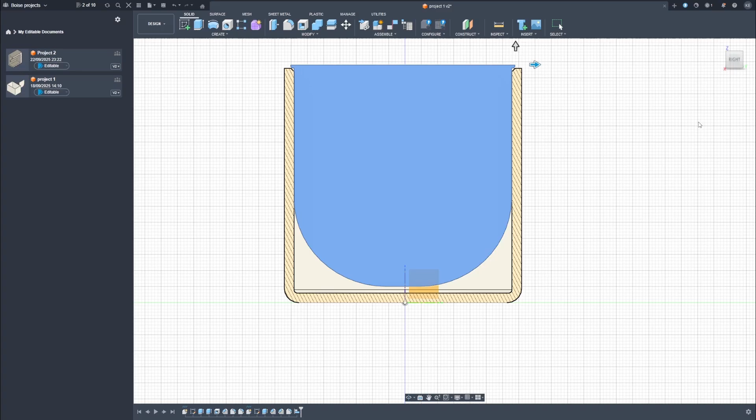So all I'm doing at this point is just adjusting the scale of the divider. It's not the best way to do this because it leads to parts of it not actually being to the same ratios as before, but it's a simple and easy fix and it should hopefully work. So let's quickly print this out.

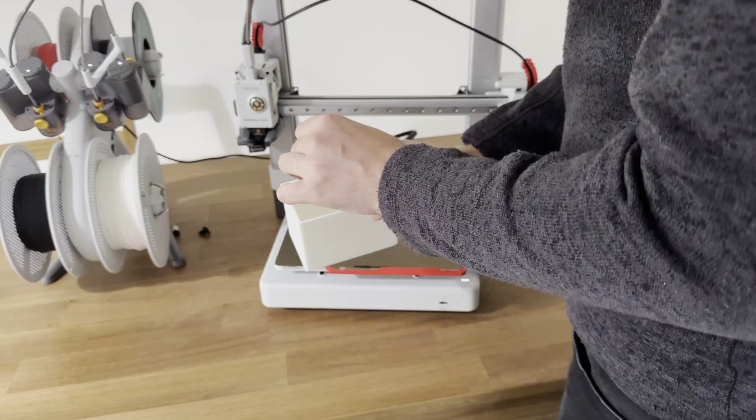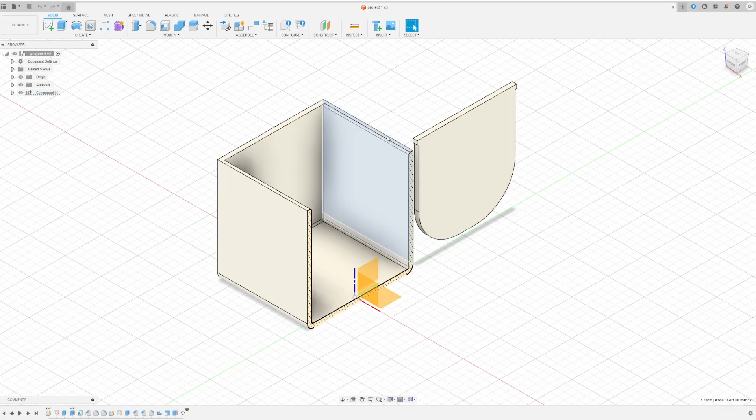Okay, so now that we're back in Fusion 360, this time I'm going to try and show a bit more of my workflow in creating this. First of all, I think we just need to remove this cutaway, which is... inspect. Yeah, so I'm definitely still new to everything.

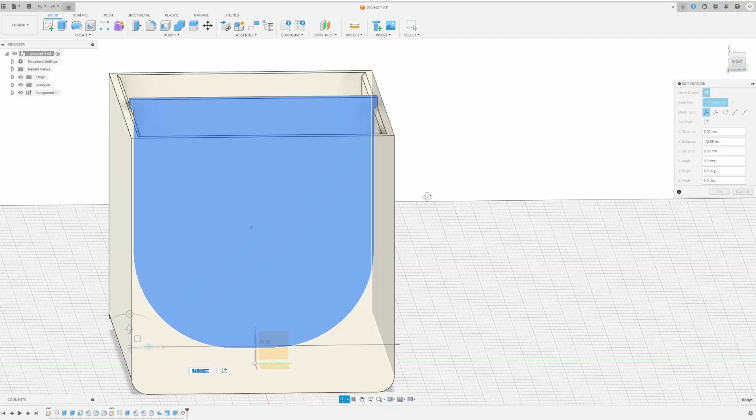Okay, now that we've got rid of that section view, let's just move this back. Should be pretty easy to about there. Probably should have done this before I removed the section view, but that seems good enough. Just want that basically recentered.

Okay, so now that that's all moved back in there, the way we are going to basically make a lid for this is we are going to construct an offset plane. I'm going to select that plane, but of course that body's in the way, so let's just quickly hide that.

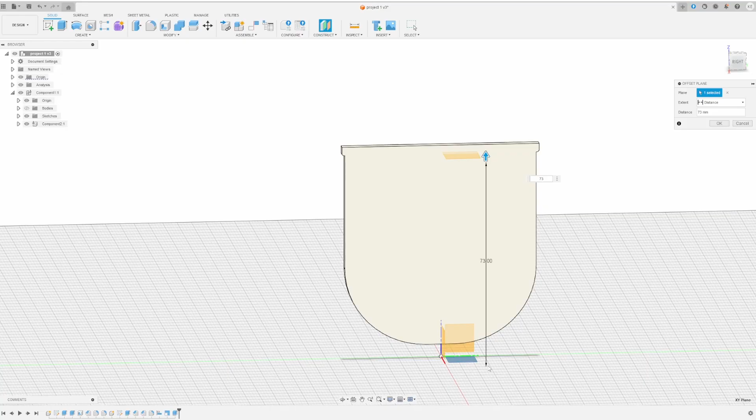Select that. I'm going to want it 73 millimeters high. Yep. So that is now perfectly in line with this.

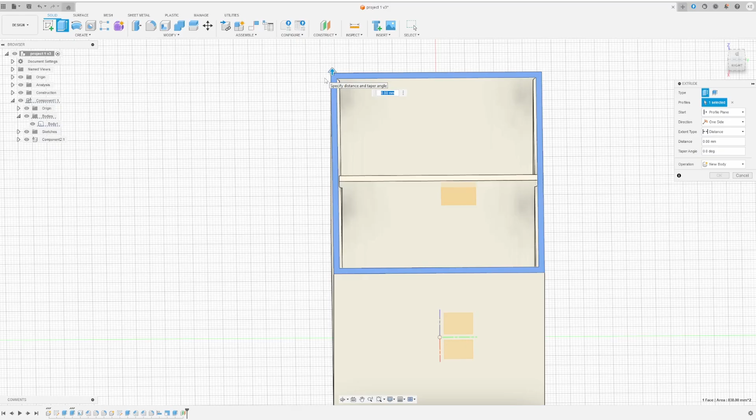We're then going to select this entire body. I'm going to work on this. Select this face, extrude it. We want 15 more millimeters for the card, plus a little extra, so let's bring that up to 17. There we go.

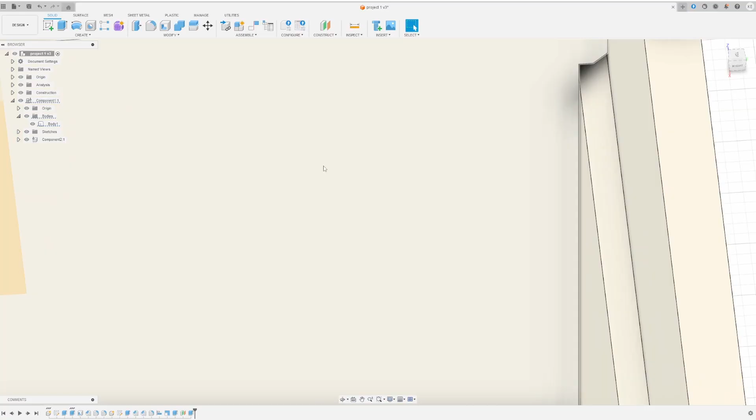So of course we still have the problem then that this is probably going to intersect this, because while it may look like a load of space here, it doesn't here. So we may need to insert these, but now what we can do is go into our...

Split body. Body to split is this one. Splitting tool is this plane. Okay, and there we go.

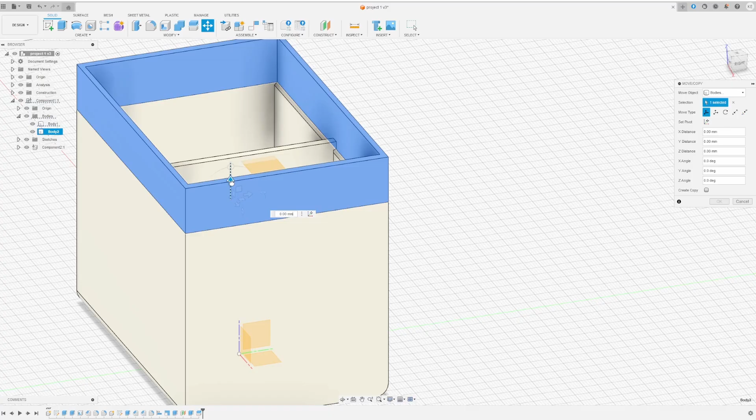So now if I was just to simply do that, select the body, move it, you see we now have a lid. It's very standard, like obviously it's not going to sit on it very well, but we now have a nice body that would fit on there. Let's just cancel that.

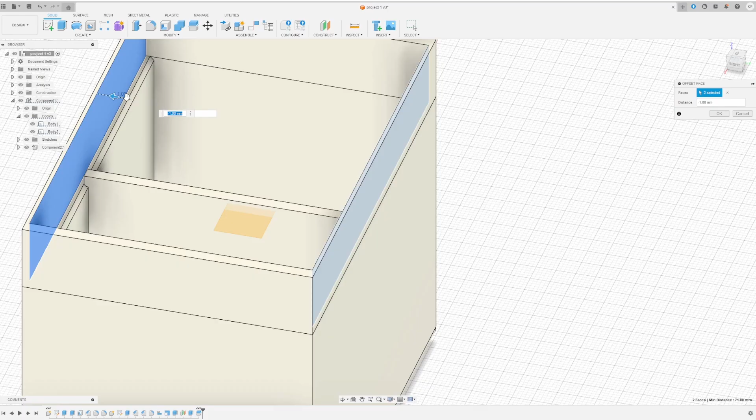So now what we're going to do is go into modify, offset face. We're going to offset this one and this one away 1 millimeter. Okay, so that should give us some clearance.

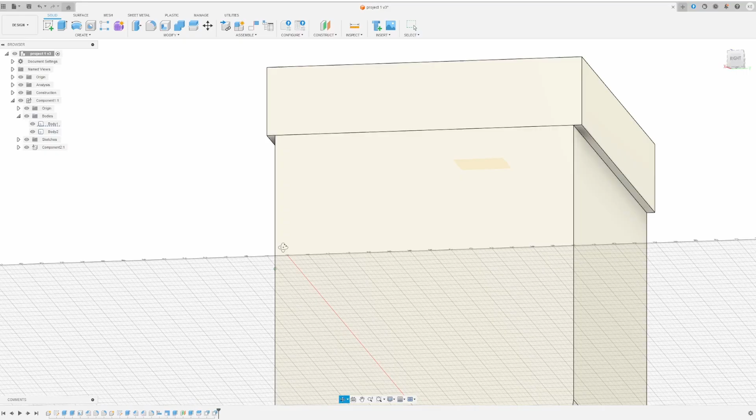And then we're also going to offset this one and this one 2 millimeters. Okay.

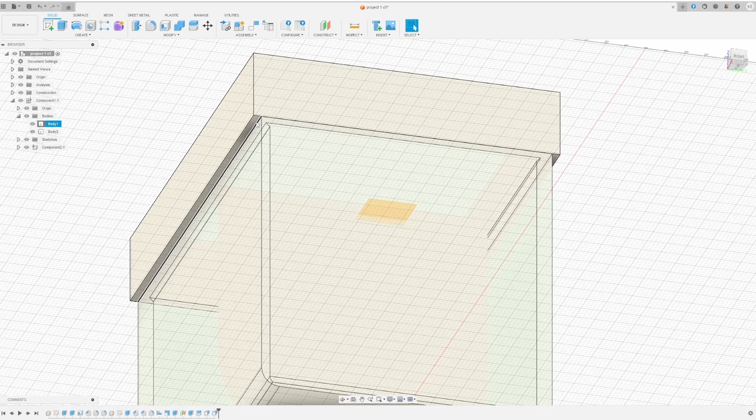So the real question is how would I do that? We've also still got to put the lid on, but that is also something I need to figure out. Okay, so let me just have a quick look into how I can bring these two ends down a little bit without clashing with this.

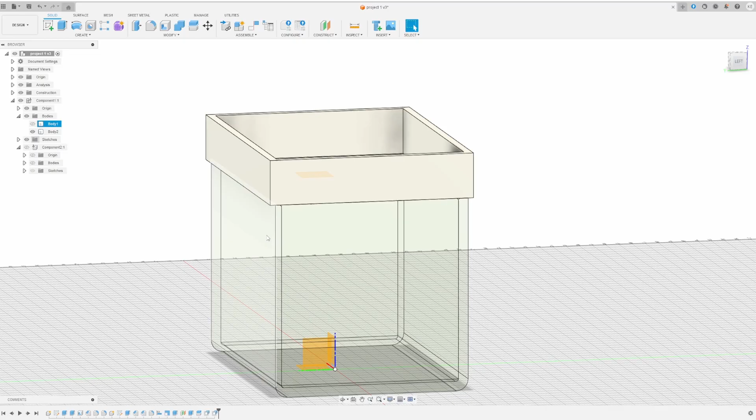So now that we've got our lid, we're going to try and get this end and this end to come down just a little bit on either side so that the lid will stay in place. And the way we're going to try and do that is create a sketch.

I want it on here. I want it to go from there to line up to that one. Just check.

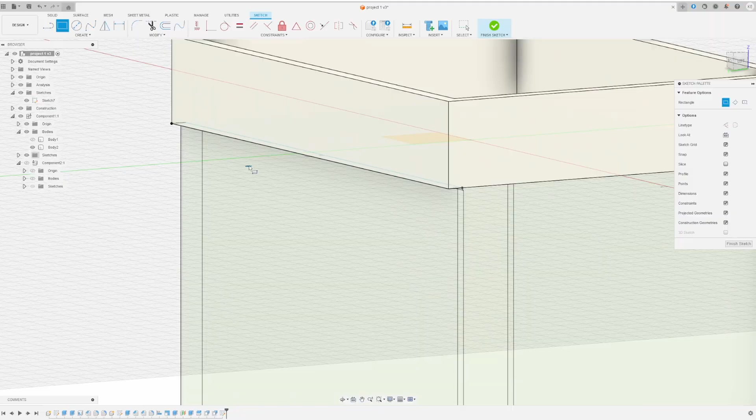Maybe I shouldn't have lowered that opacity. No, I really shouldn't. No problem.

Make it 2. There we go. Actually, let's not make it 2, let's make it 1.5, just so that we've got a little bit of extra room. Okay.

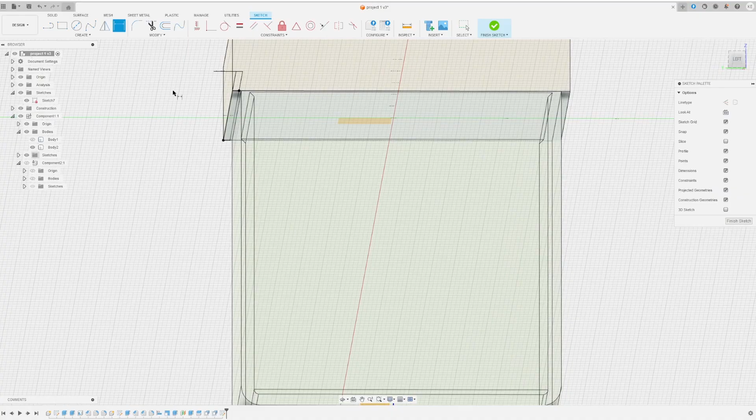Let's mirror that. So the object we're going to mirror is the sketch. The mirror line is going to be... let's just hide that body. Is it that one? No, that one. Yep, that's the mirror. Okay.

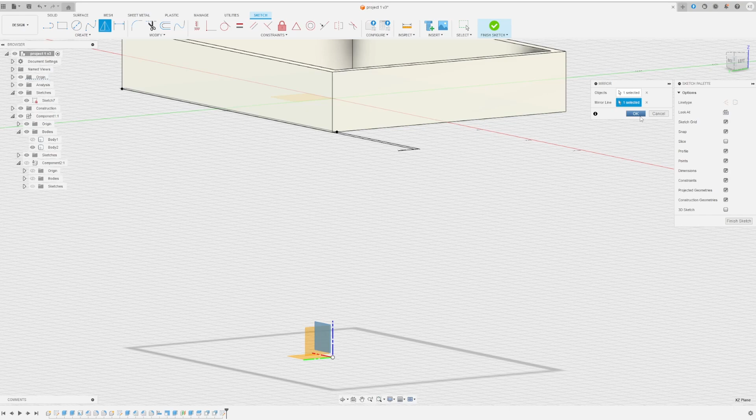Oh, that's only mirrored that bit. Let's change that. So just going to quickly skip through this bit. This is basically me just trying to figure out how to set the mirror, but it turns out that I didn't get it centralized, so I just had to fiddle for a bit and get everything lined up properly.

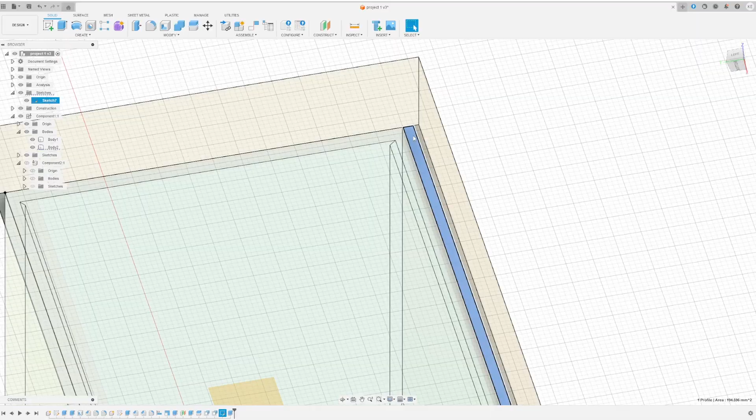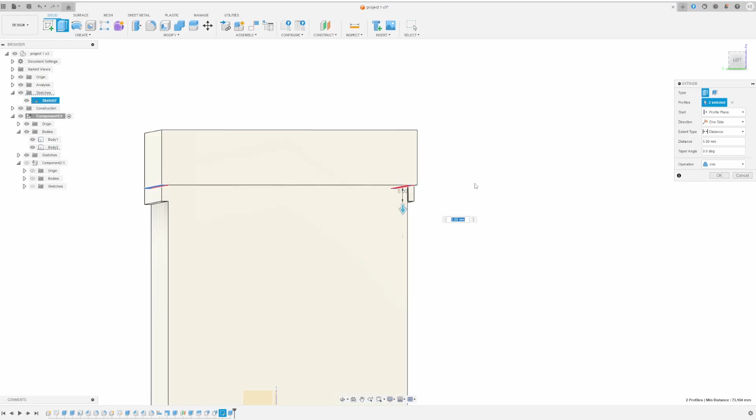Now that we've got these two, I do need to probably move this a little bit over once I've done it, but we're going to select this face, and make sure I select properly this face. Then we're going to bring these down 5 millimeters. Don't want these to join.

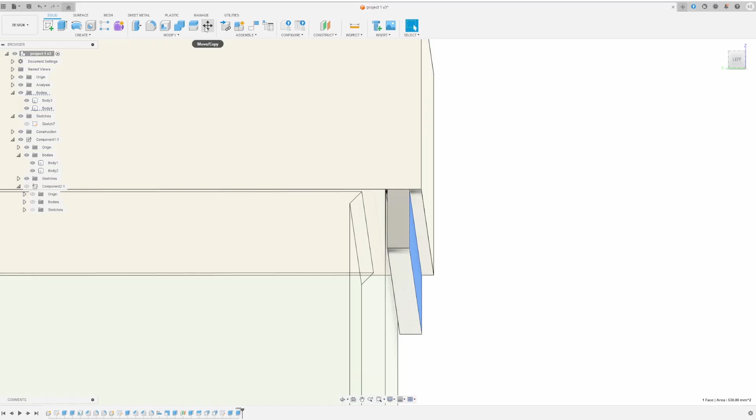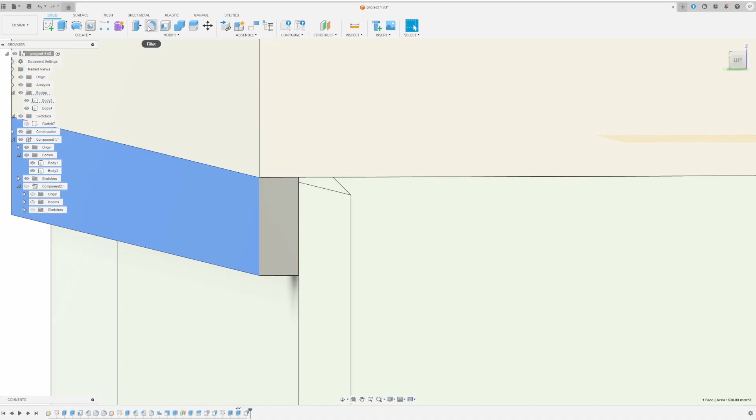Okay, let's just offset this face a little bit, so there's a nice gap there. We're going to offset this one as well, a millimeter, and then just come in, select that one.

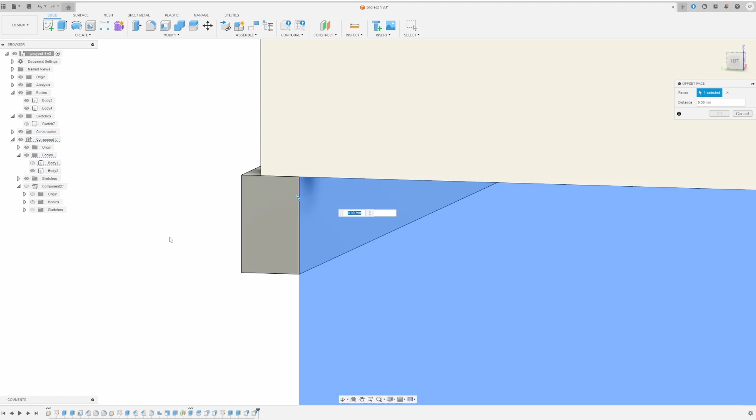Let's hide that body for now. Cancel that. I'm still seeing it, so I hid it. There we go.

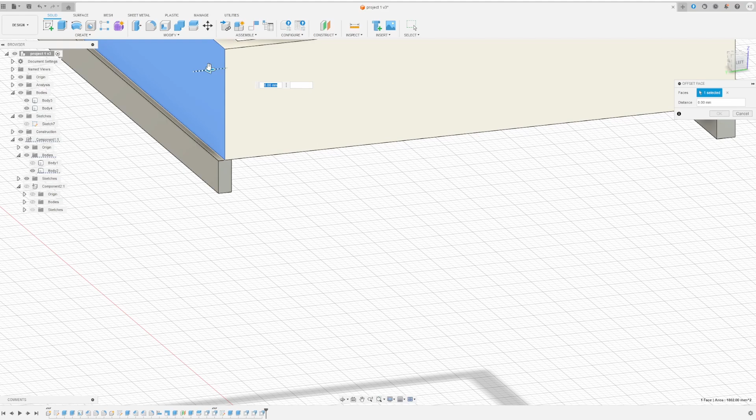To offset this face, a mil. Okay, and then this face can also be offset. So this is definitely not going to be aligned perfectly.

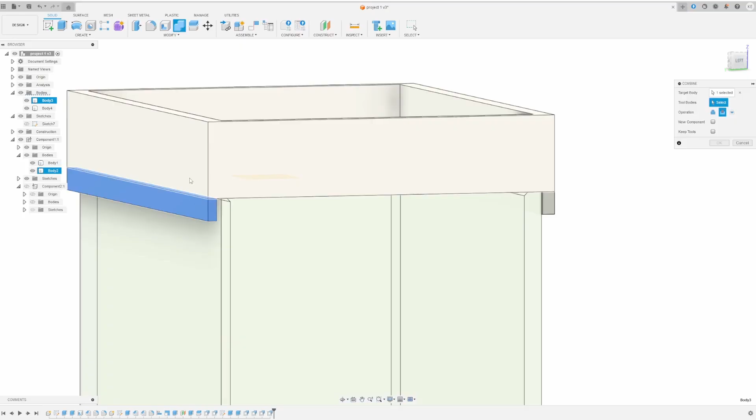Bring that in. So now we'll have some gaps because I can't really get a perfect fit, since I didn't really design the lid as I was creating this, but that should hopefully work. Okay, now what we're going to do is combine that and that, and that and that. Combine that to that. And there we go.

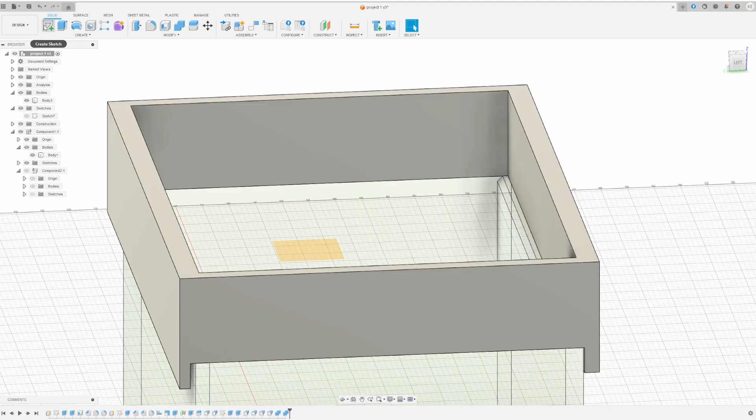So now all we need to do is create a lid. So a new sketch, this is the plane, and we're just gonna go from that corner to that corner. Finish sketch. Okay, we're gonna extrude that.

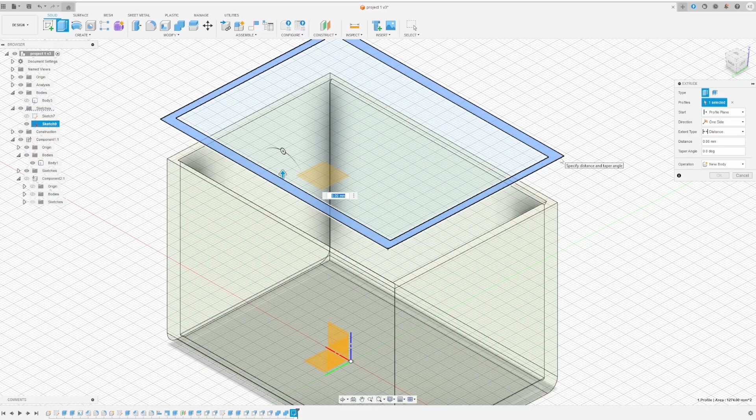Let's just hide that body for now. That one. There we go. We'll go up 4. There we go.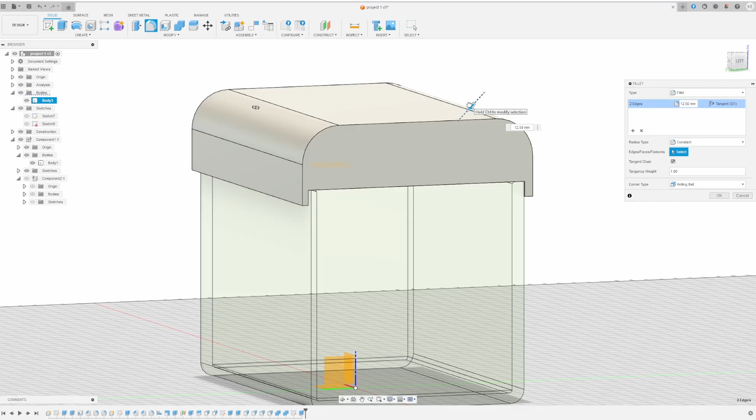So I mean that is technically a lid, but let's make that look a little bit nicer with some fillets here. Yep, I like that.

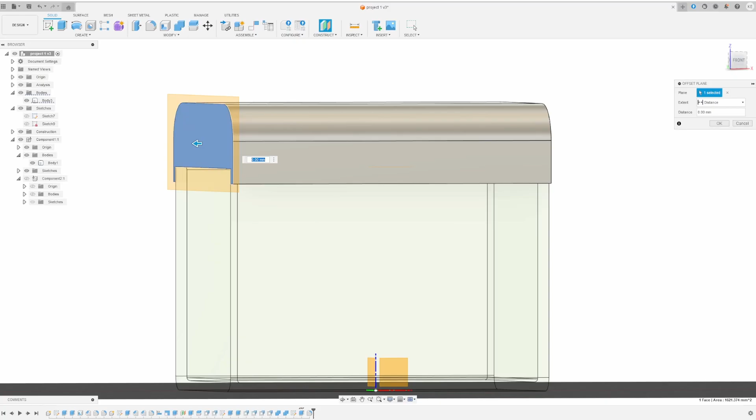And to stop the lid from just sliding backwards and forwards, I'm actually going to try something new. So we want to create a plane here. Okay, but then we're going to extrude this out 2 millimeters.

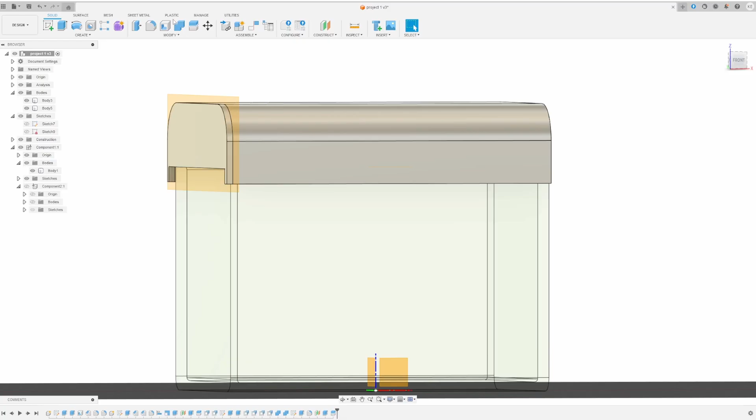But then we're going to split that - no, not split face, split body - split this body across this plane. And I'm going to move it down 2 millimeters. Looking good. And then is it going to allow me to mirror this?

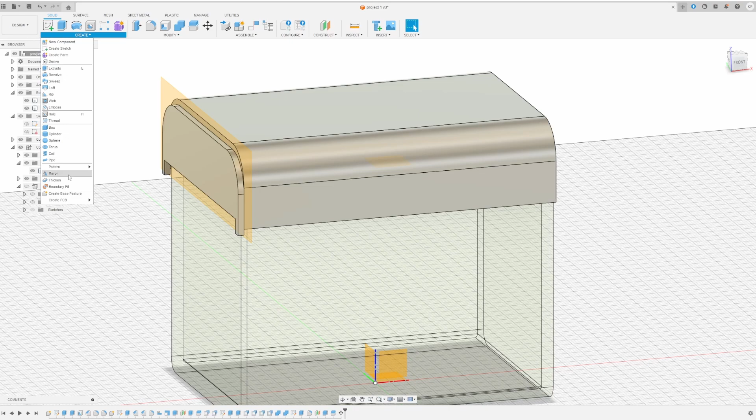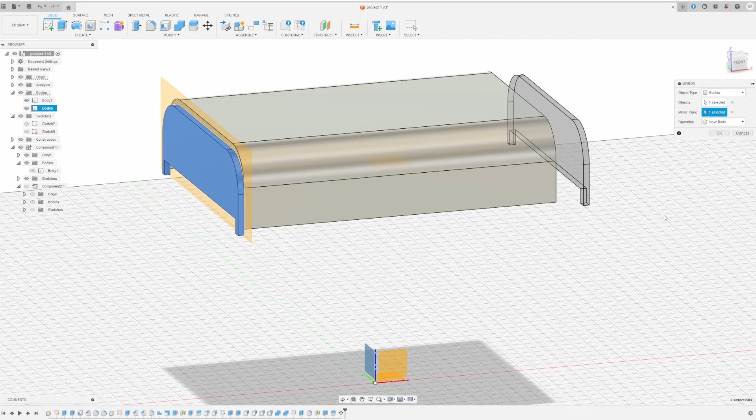If I can remember where mirror is. I want this to be mirrored across. No. This to be mirrored - that's move. This body to be mirrored across there. Ah, I really need to learn how to centralize things. Can I just move that in?

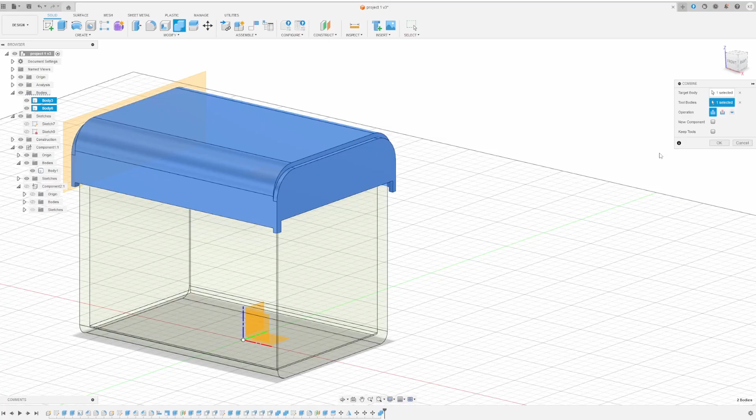Yep, that looks good. Let's bring back this body. Okay, now we just need to join all this together. So that one to that one. Okay. And same again, that one to that one. Okay. And there we have it.

A somewhat janky, but hopefully should be pretty well looking lid. Let's just move it up temporarily. Yep. I'm happy with that. So let's send it to the printer.

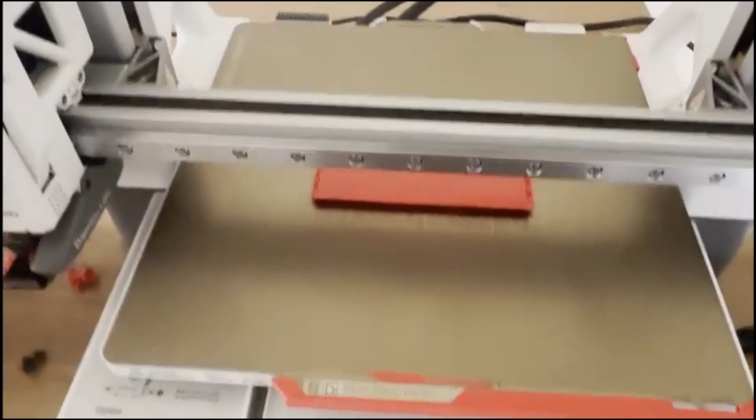Oh, well that's not good. We still got a little bit more to go. So as it turns out, partway through the printing process, it has run out of filament on the spool.

So let me just quickly remove this, if I can figure out how you do that. There we go. Okay. Fortunately, we've got a separate one, a spare one. So let's - never done this before - so let's have a look.

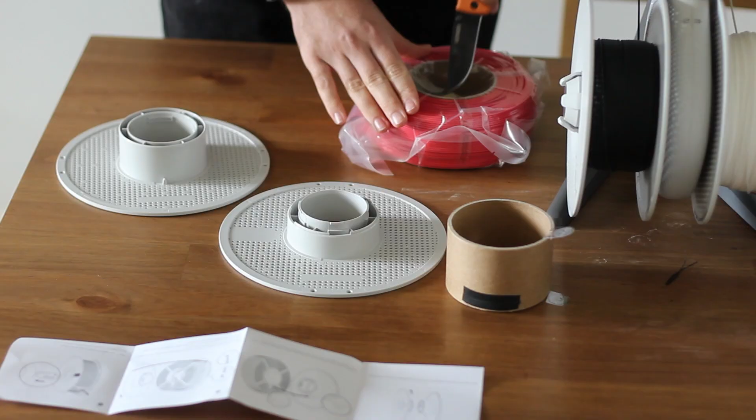So we've got instructions, place them there so I can read them. So twist open. Okay, so find the locator, a tiny block on the white piece and a notch in the inner ring. So there's the locator. I'm going to align it with a little notch right there. So we'll place that in there. Okay. So then we place this part in.

Okay, and then I guess then tear and pull out the plastic strips. Okay, that's all of them. So then we grab the end of the line, wherever it is, right there. And then we just put it back in, feed it in. Grab that, and feed it back into the AMS.

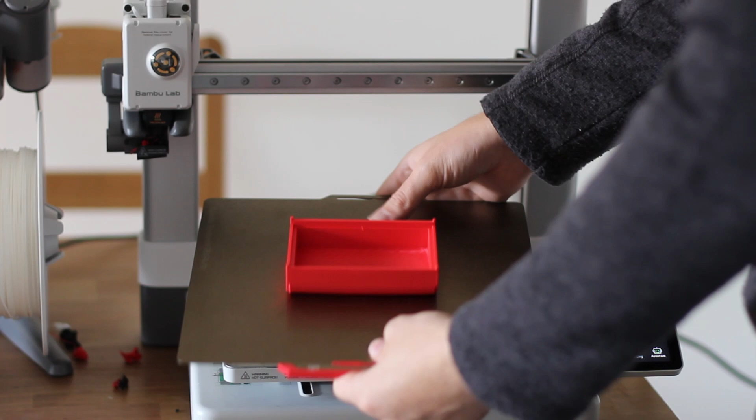So that is now the lid all printed. Obviously we had the problem halfway through with the spool running out, but it seems to have resumed that print pretty okay. Now, reviewing the print itself, we've got a lot of stringing here and here.

Obviously that's probably due to just too much of a sharp angle there, because I'm not too experienced when it comes to actually creating chamfers or fillets, so I obviously need to do some more research there, because it's also a little bit here as well where that step is.

And more importantly, the lid comes on and holds it. Now I can tell I've definitely not put in too much of a tolerance from that width to that width, so obviously I'd probably need to just bring this over a little bit more in that direction next time if I was to do one of these.